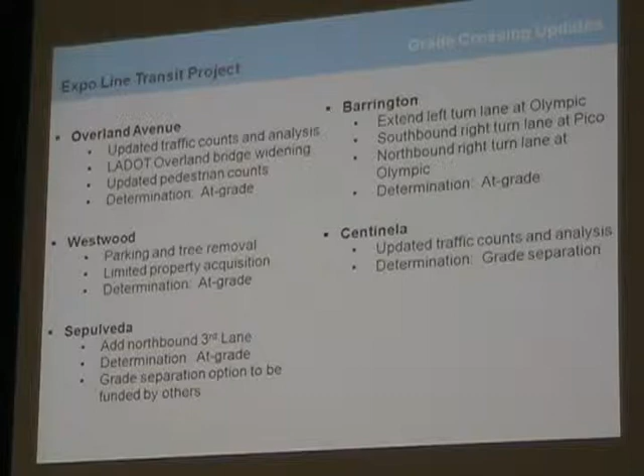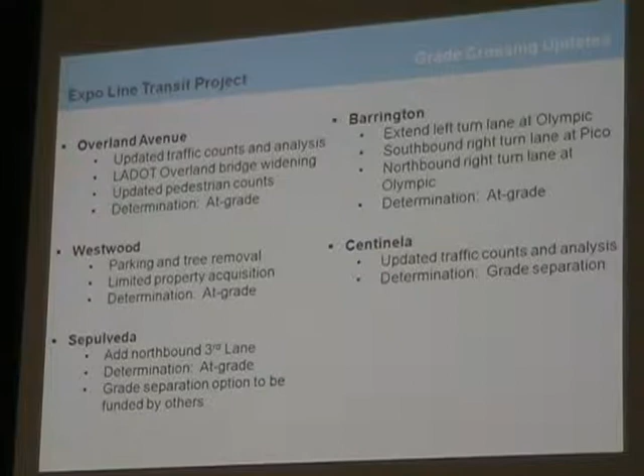Across our right-of-way, in addition to going forward with our recommendation to do an at-grade crossing of Sepulveda, we are also clearing as an option the grade separation of Sepulveda. So we'd go over Sepulveda if someone other than the Expo Authority comes up with the funding to do that.

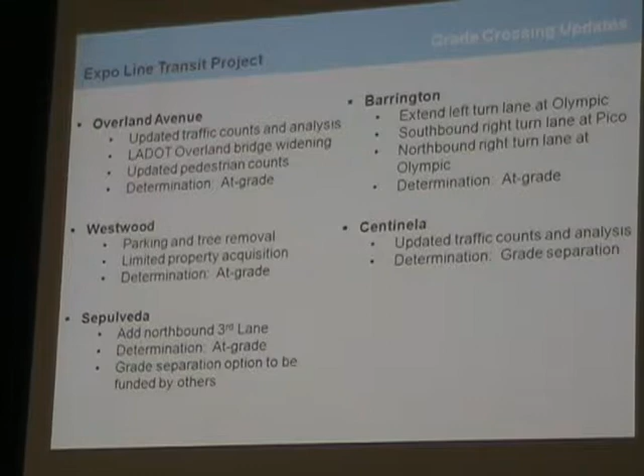At Barrington, we did some additional studies and additional counts there, and extended some of the turning lanes, and we're still going with at-grade.

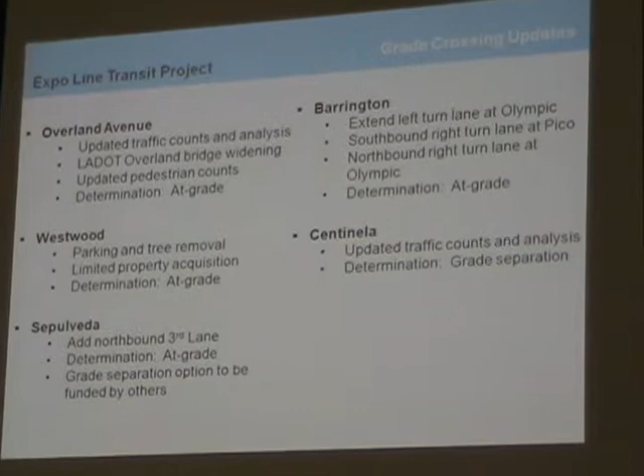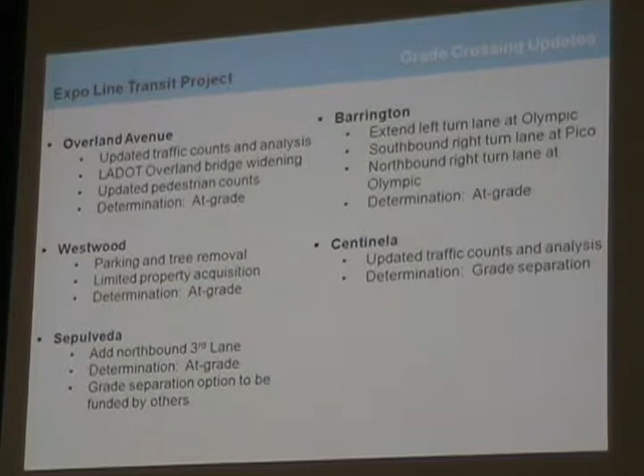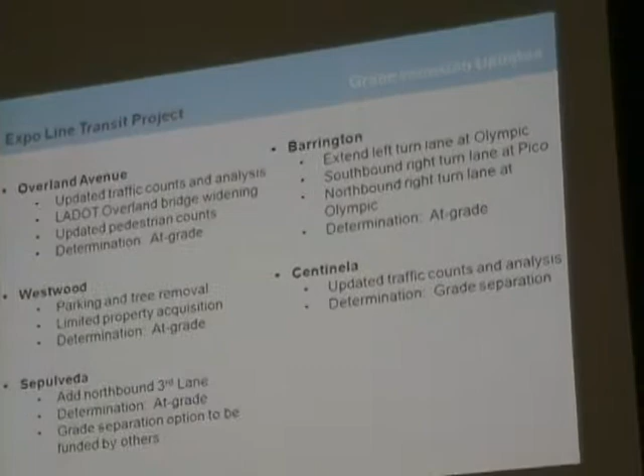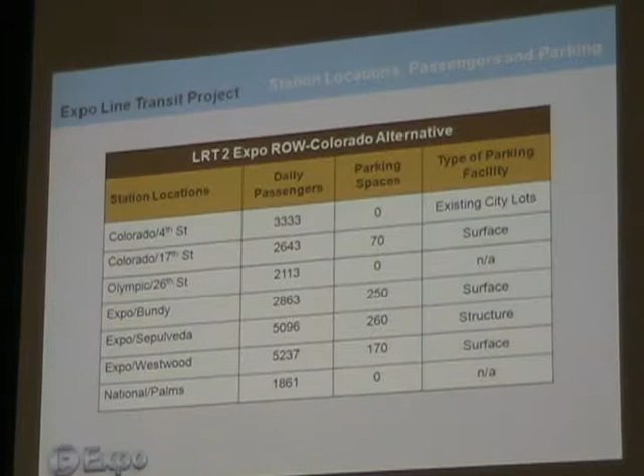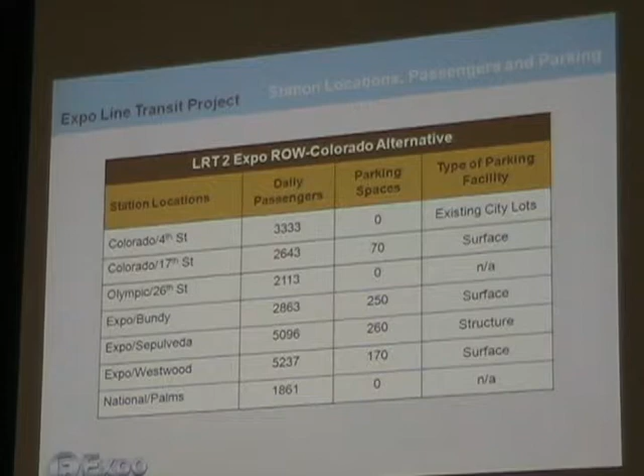When we took our draft to our board of directors, they looked at the work that was done, considered some of the testimony made at their meeting, and told us that their preferred alternative was the second alternative, using the Expo right-of-way and Colorado to get to Santa Monica.

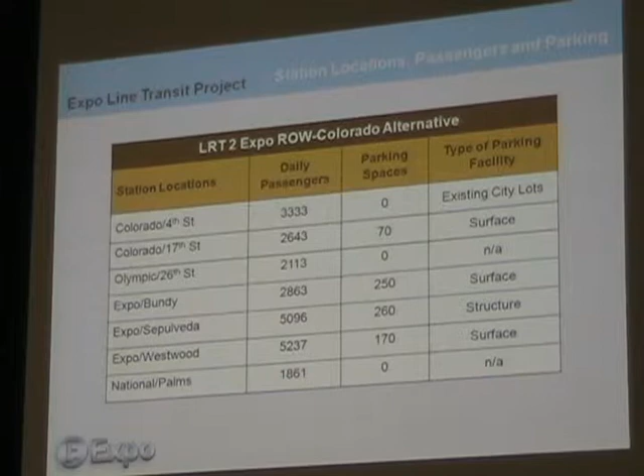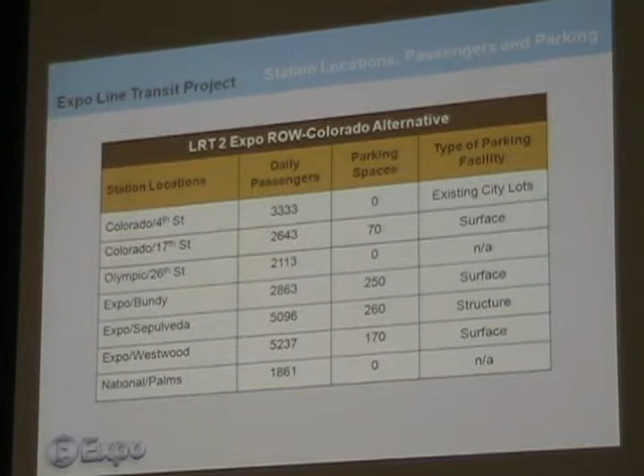You can see in this case the station passengers we're forecasting, starting at the west at Colorado and 4th and heading east to National Palms. The two closest to here, Expo Sepulveda and Expo Westwood, are the highest ridership stations.

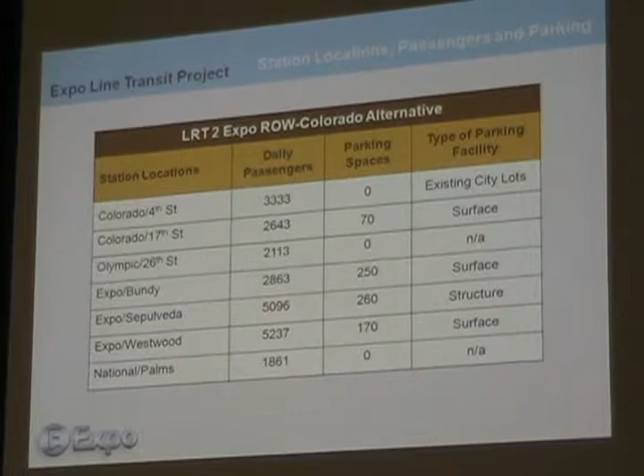In the next column, you can see the parking we're proposing to provide. One change from our draft is that in Santa Monica, the city is going to make city parking available, so where we were proposing to put a couple hundred spaces at 4th and Colorado, that's now going to be provided by existing city parking.

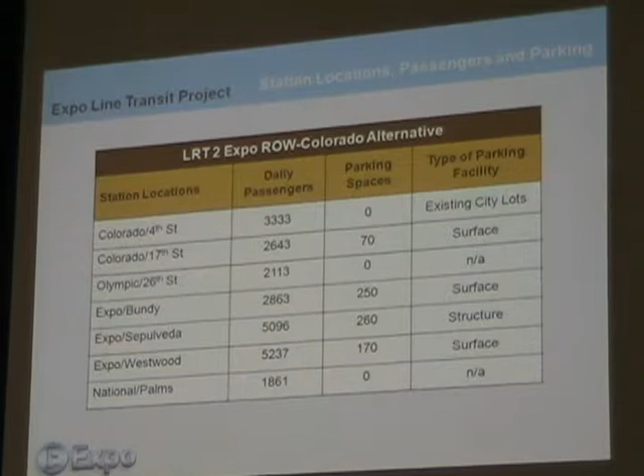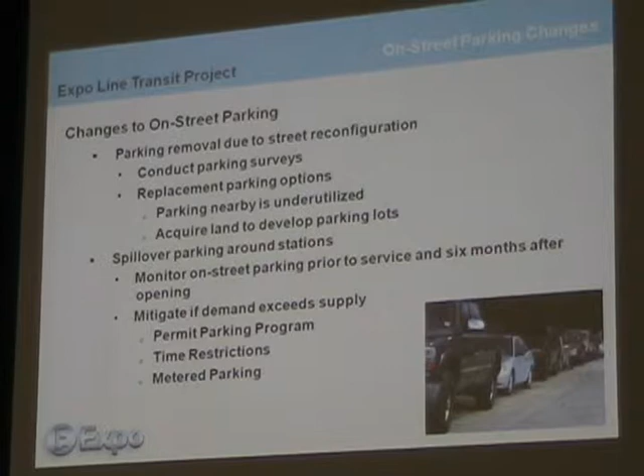The other area folks were concerned about was on-street parking. To update that, we went and recounted all of the existing parking in areas where we were proposing to take some parking away from on-street. We counted it in May, not in the summer or dead of winter, which is a good time to count. We counted it in the middle of the day and at night, catching residential overnight parking and daytime parking. We looked at utilization, and where we were taking parking, we looked at whether there was enough empty parking in the area so we weren't taking all the spaces away.

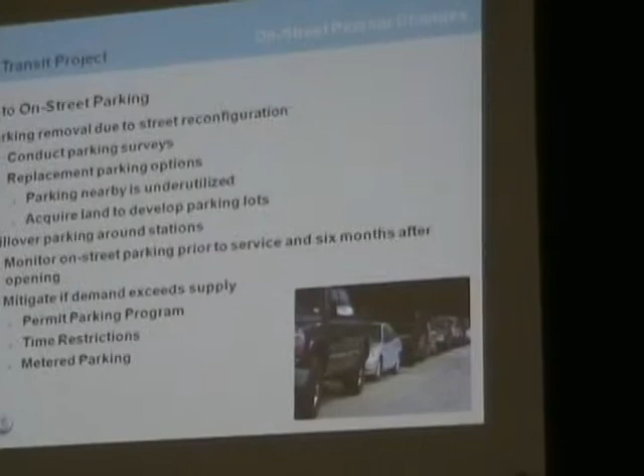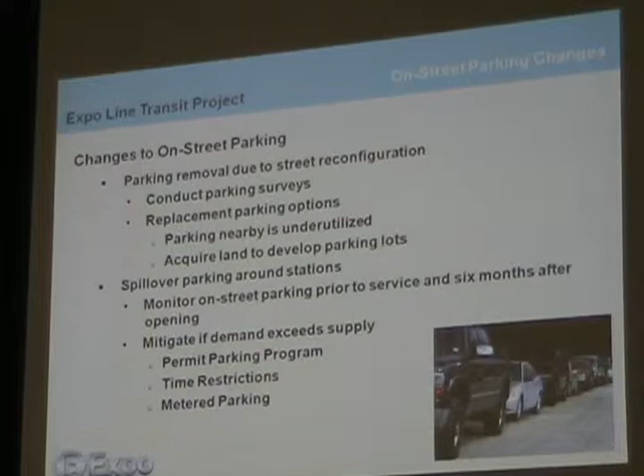In some cases, which you'll see in the final, particularly on Venice, Sepulveda, and Colorado, we're proposing to buy some property to provide replacement parking. In most other areas, there is sufficient underutilized parking to make up for the spaces we're taking.

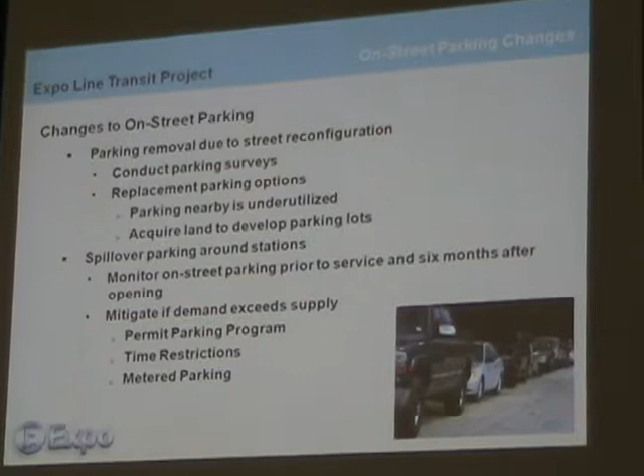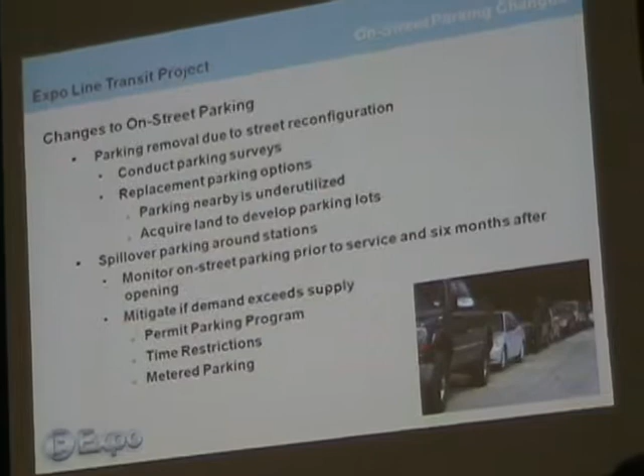The other thing folks were concerned about was spillover parking at stations. Since we're not providing a lot of parking at stations and we're relying on bicycle, bus service, and walking, would transit patrons be parking in the neighborhoods?

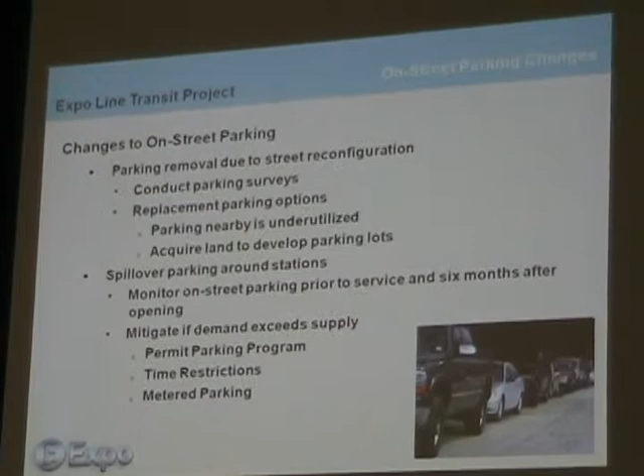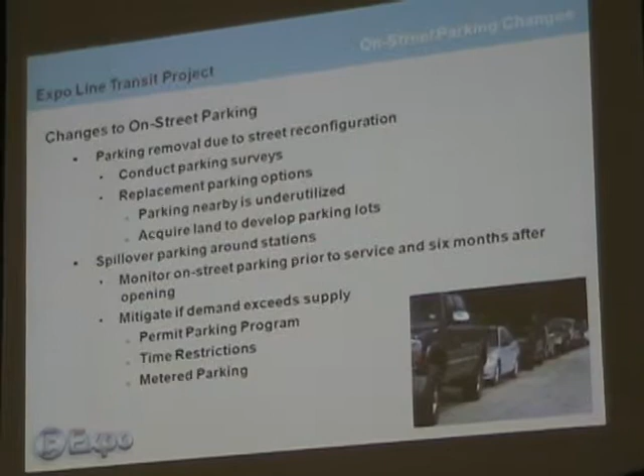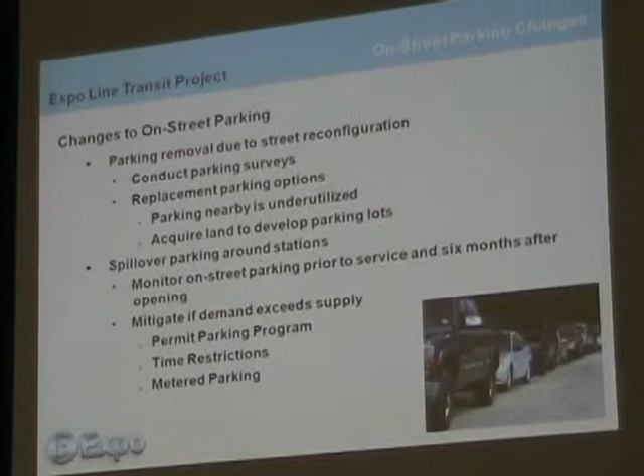We're committing to monitor parking around the stations both before and after the project opens, if the project goes forward. If we see spillover parking happening in areas that don't presently have residential permit parking, we'll help put in residential permit parking, working with the cities. There are other things you can do too, like time restrictions—2-hour parking, so it's not workable for a commuter—or metered parking. Those are the kind of solutions we can do.

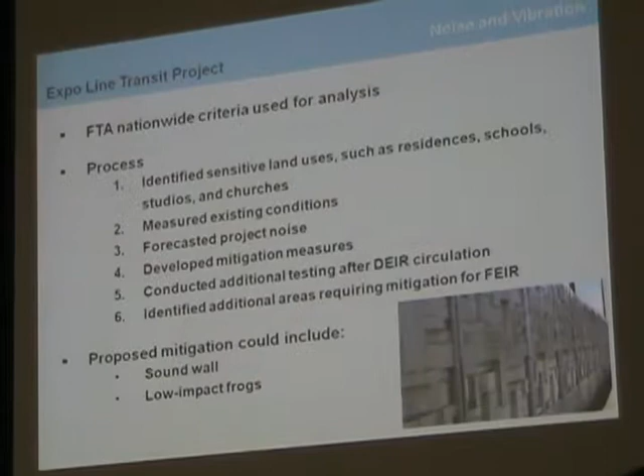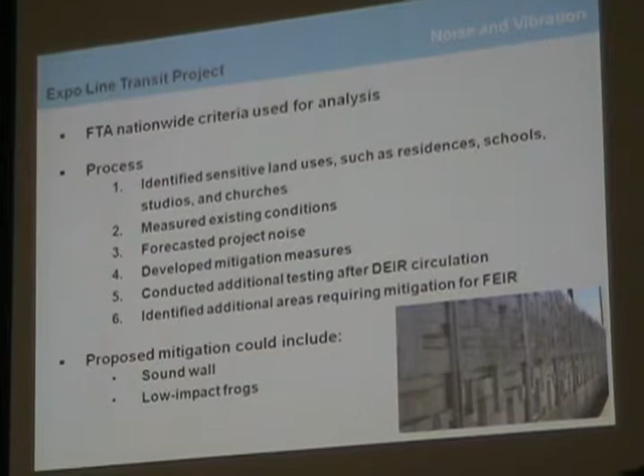Noise and vibration, always an area of concern. Just a recap: we're using the national standard that the Federal Transit Administration, that's what FTA stands for, uses for transit projects across the country. So we're using the standard that's used for all transit projects.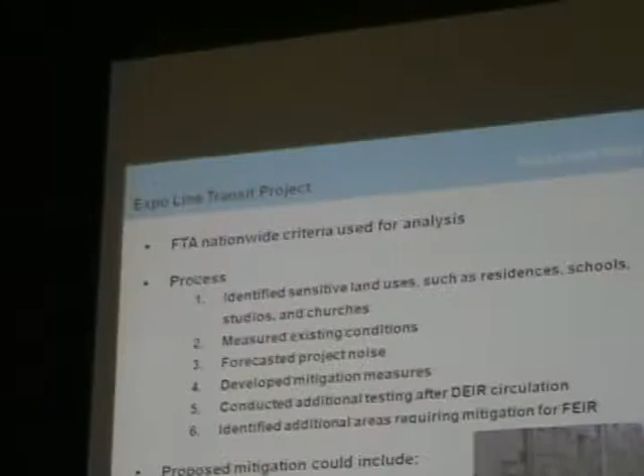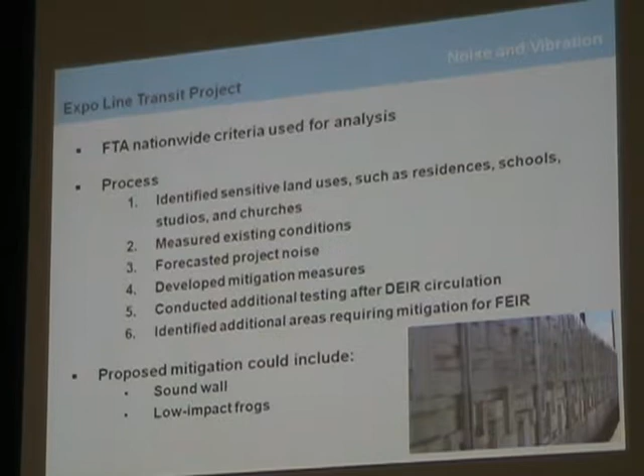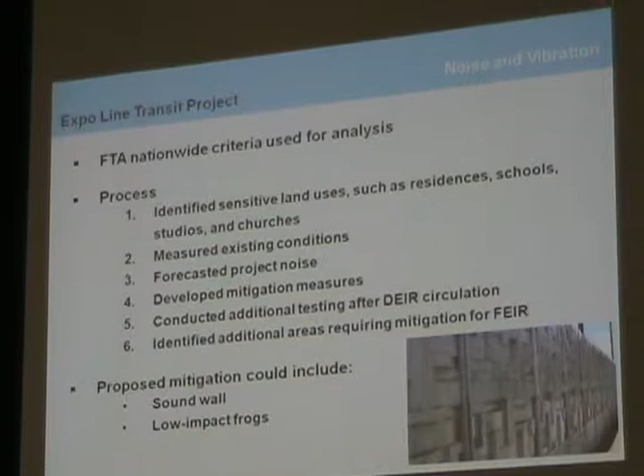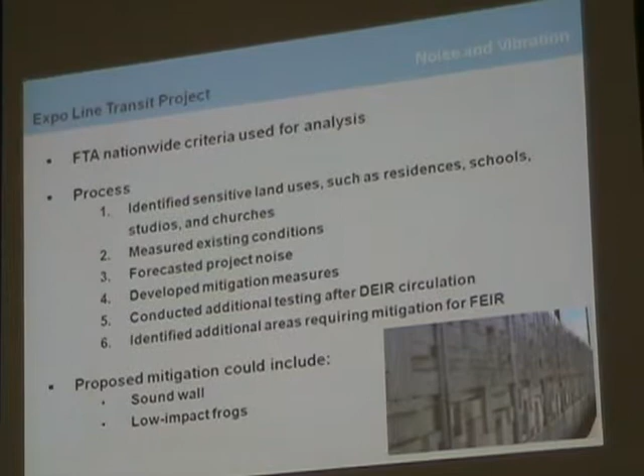The process we go through, very quickly, is we go out and survey all of the areas we're looking at to see what kind of uses are there—residential, hospital, parks, libraries, or offices. We also measure the existing noise because we don't want to significantly add to the noise level in a community per those standards. By measuring other existing rail systems, like the Pasadena Gold Line for example, we can forecast what kind of noise this service would create, and we develop mitigation measures to keep the noise level within those federal standards.

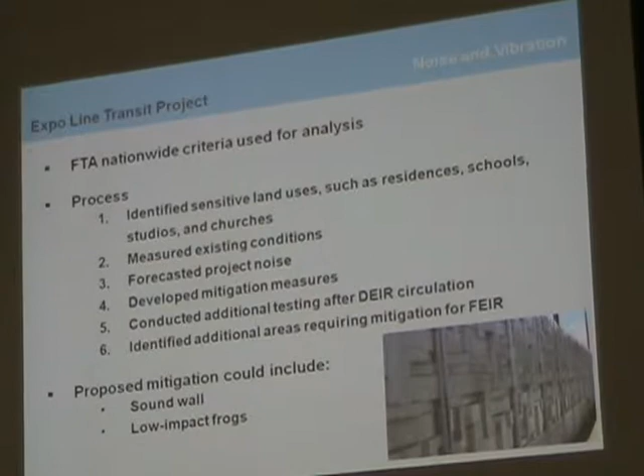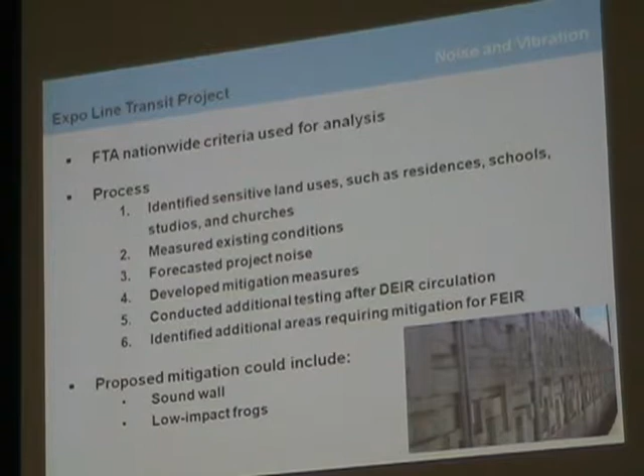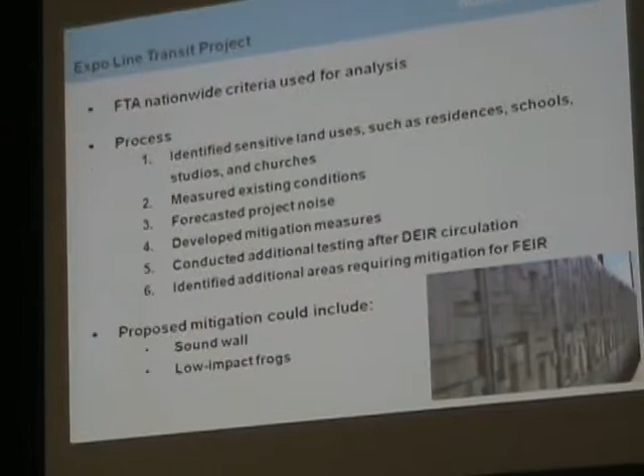All the detail of this is going to be in the environmental impact report. For those of you looking at the wall maps, you saw green lines in a number of places where we're proposing noise walls along the edge of our right-of-way to make sure the noise stays within those standards. We also have low-impact frog, a special kind of track work that lets the train pass quietly. And again, these are electric trains.

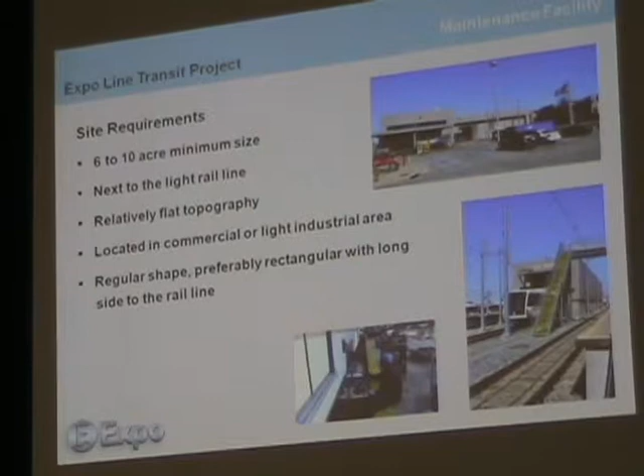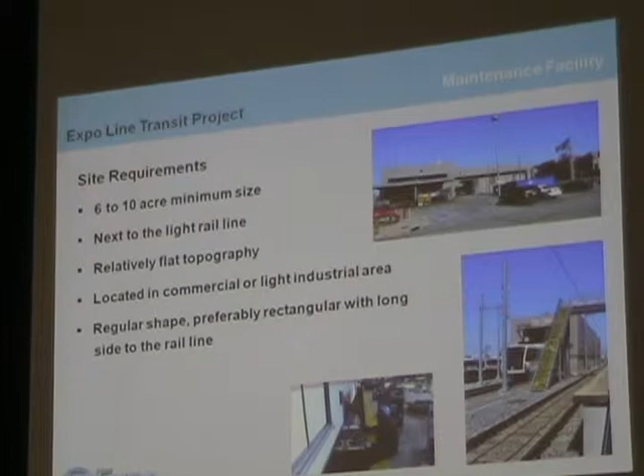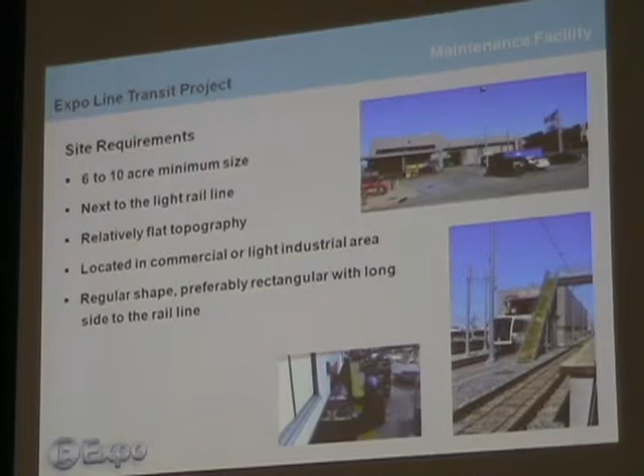Another concern, particularly in Santa Monica, was where a maintenance facility would be located and what it would look like. We're proposing a maintenance facility because the trains, just like our cars, have to be serviced, washed, checked for safety, and have things like brakes, headlamps, and windshield wipers changed out. To site one, we need about 6 to 10 acres, right next to the rail line or very close to it, flat, and ideally located in a commercial or light industrial area.

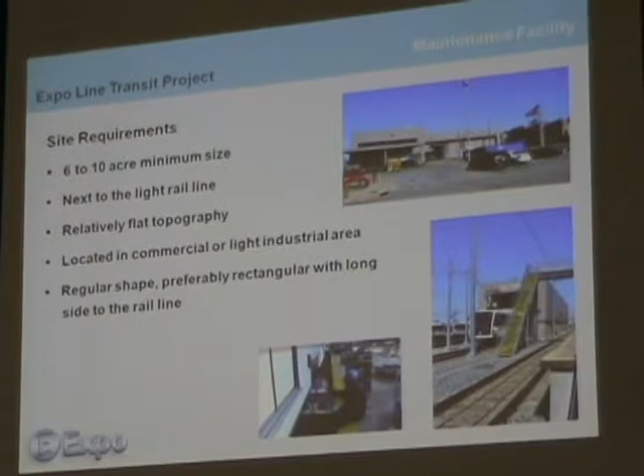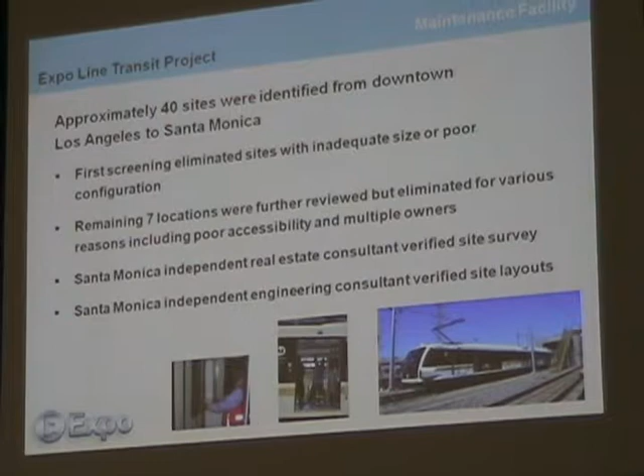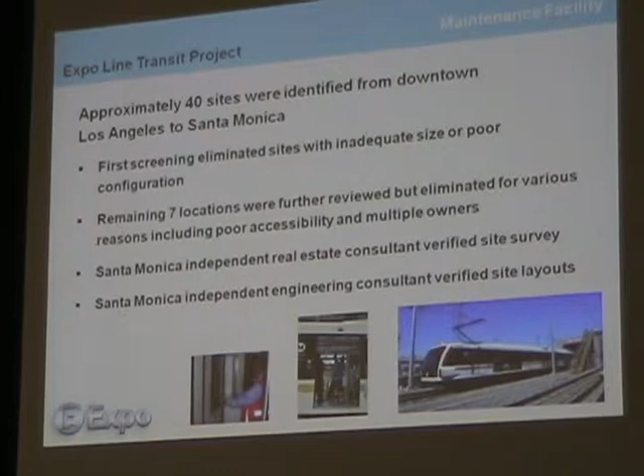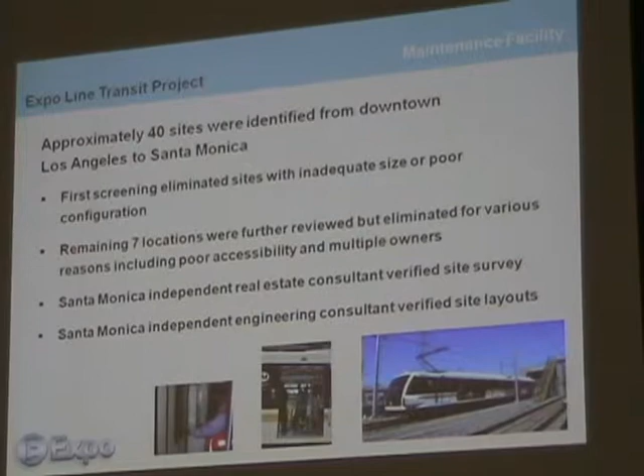We looked at a lot of sites trying to find a place for this maintenance facility—approximately a little more than 40, from downtown all the way to Santa Monica. We went through a screening process based on that criteria: 6 to 10 acres, flat, next to the rail line. At the end of the day, it came down to only a couple of sites that could meet those criteria, and they both happen to be in Santa Monica. So we've been meeting with folks there to talk about it.

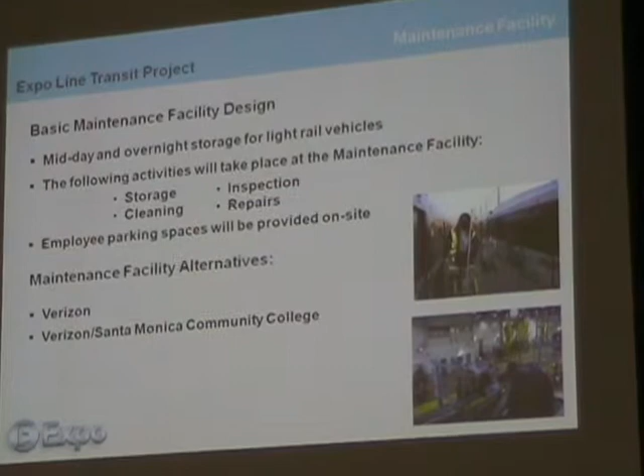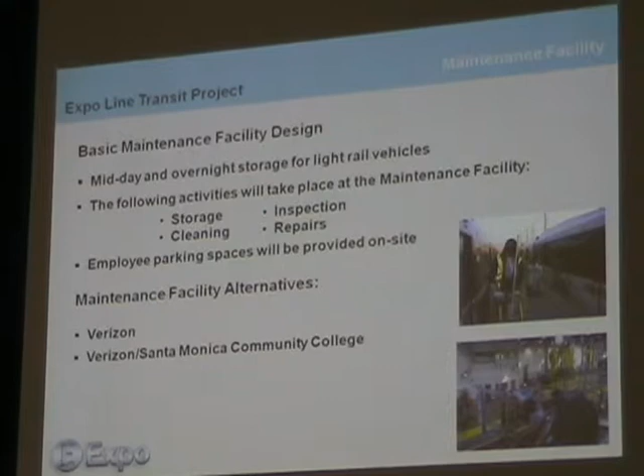What happens at these facilities is that a good bit of their life is spent as a parking lot for light rail trains, where they're parked overnight and during parts of the day when we're not running as much service as at rush hour. This includes storage, inspection, and a light repair facility.

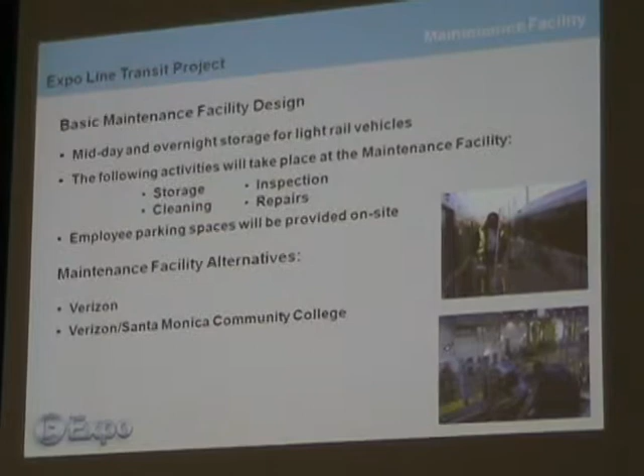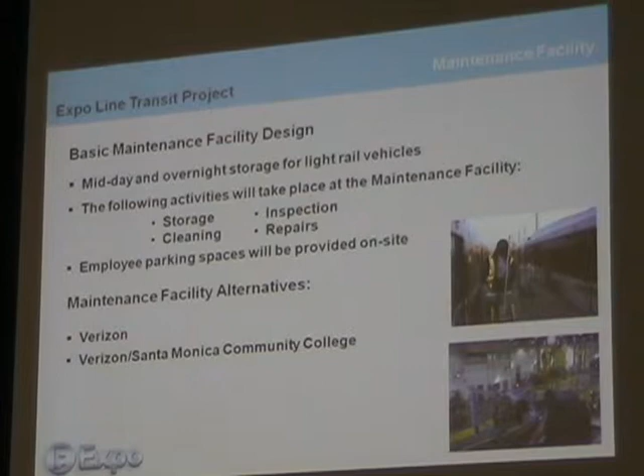We've basically got 2 sites, both just east of Stewart Street in Santa Monica. One is a Verizon maintenance facility—it's a maintenance facility today for their truck fleet. The other is partly the Verizon site and partly a parking lot that Santa Monica Community College has. So we're working with Santa Monica to figure out how that can best be done.

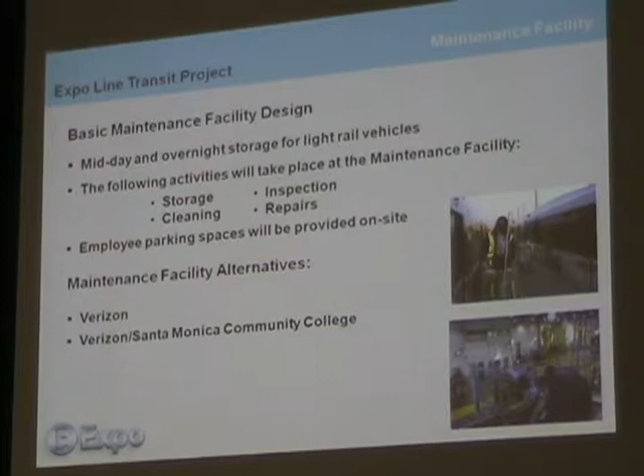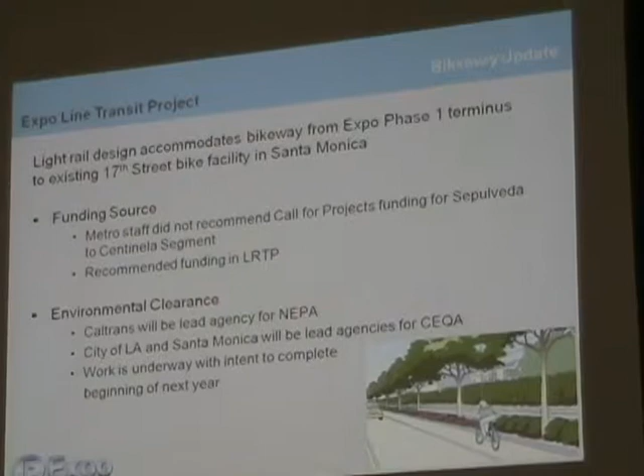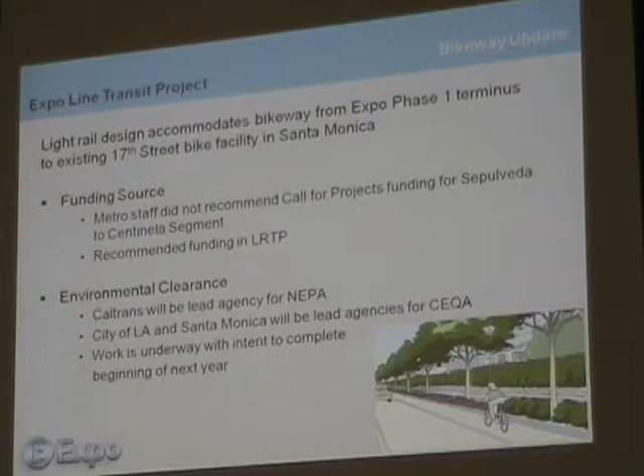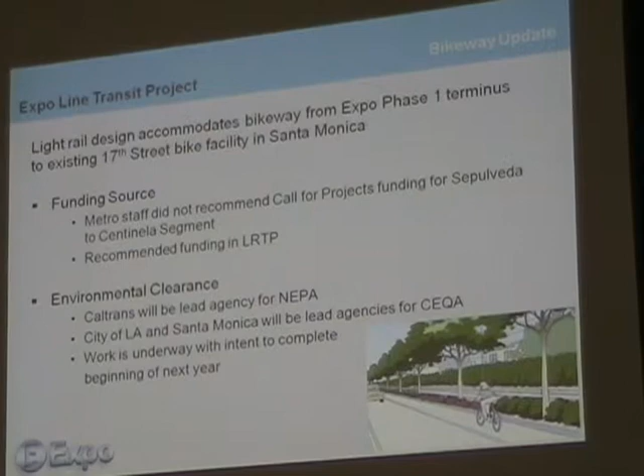Another area where we got a lot of comment was the bikeway. In our work, we're making sure the bikeway can be accommodated from a design perspective, but the bikeway itself is going through a separate environmental clearance here in Los Angeles by DOT and in Santa Monica by the city of Santa Monica. So they're taking their bike facility through the environmental process, and the bikeway would be funded separately as well.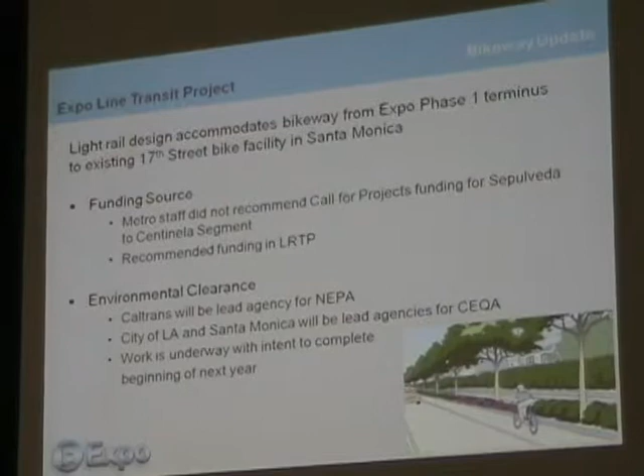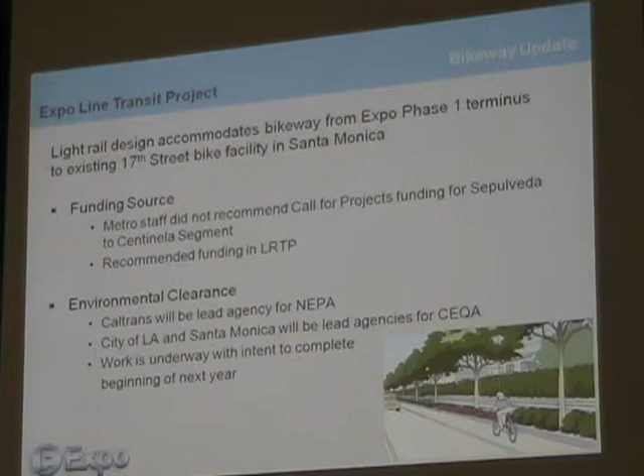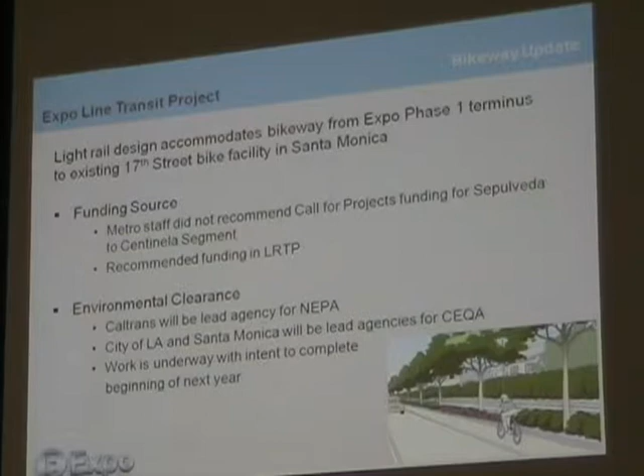In Santa Monica, it looks like they have enough money from prior grants to fund construction of the bikeway along with the light rail project, if it's all approved. In Los Angeles, there's a gap in the bikeway roughly between the Santa Monica line and Sepulveda Boulevard, so they're looking to get funding for that under the long-range transportation plan, or LRTP.

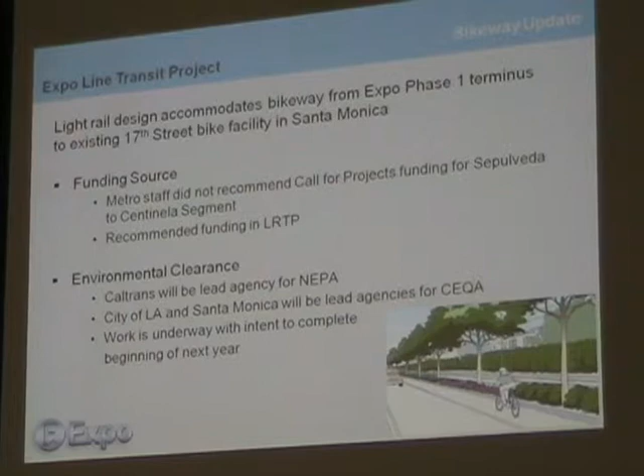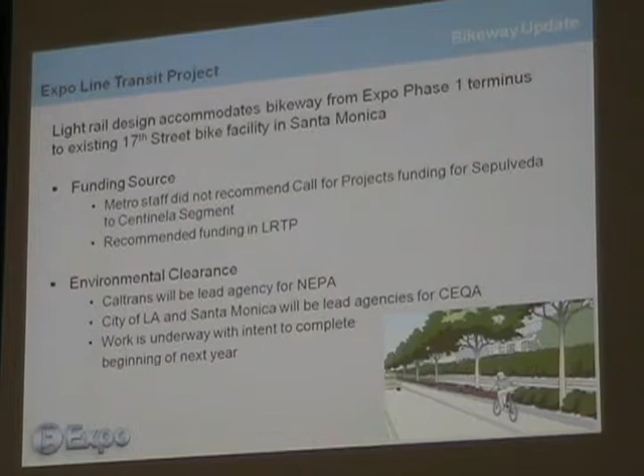The goal is that the 2 cities will take the bikeway through their environmental process, we'll do our environmental process, and then we'll come together next year when everything is supposed to be approved. Expo will do a contract with the 2 cities to build the bikeway along with the light rail project, assuming both get approved and go forward.

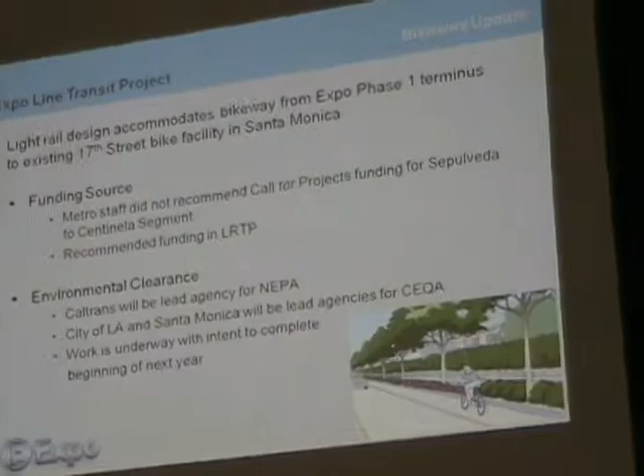Okay, so what I have left before we go to Q&A, so you don't get too nervous that I'll go on forever, is just a quick schedule update, and then I've got about 2 minutes of video that we've prepared.